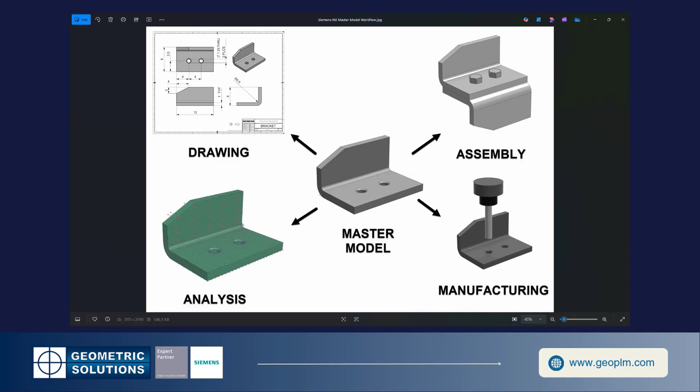I'm going to start using what we call the master model approach. So in this case, what master model does basically, whether it be a component or subassembly, I can pull information into a different file and work concurrently. So I could have one person doing one, another person doing the other, whether it be analysis or manufacturing. Once I have these capabilities in the context of Teamcenter, I'll be able to do this.

So in this case, I have a simple assembly, and each assembly is comprised of different components. I'm going to quickly highlight what they are. As you see, I also have my layer definition turned on. So in this case, I've already predefined all the layers in the specific locations of each layer. So now what I want to do is move these fasteners to another layer, whether it be a common practice within the company, or I want to use that to control the display of my component.

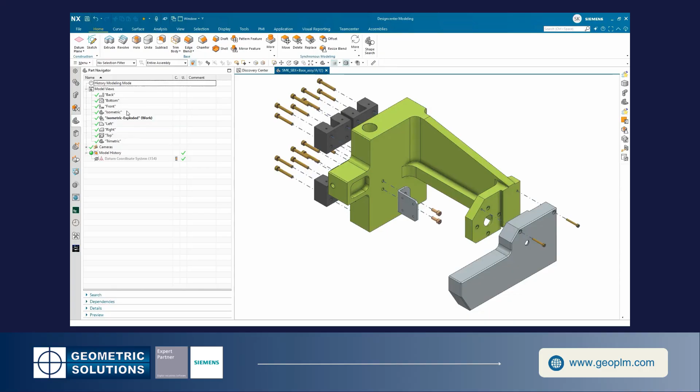I will quickly review some of the views already created inside of this master subassembly. So I see that there is an exploded view that's already been created. This is a very common practice to help understand how these parts are assembled together.

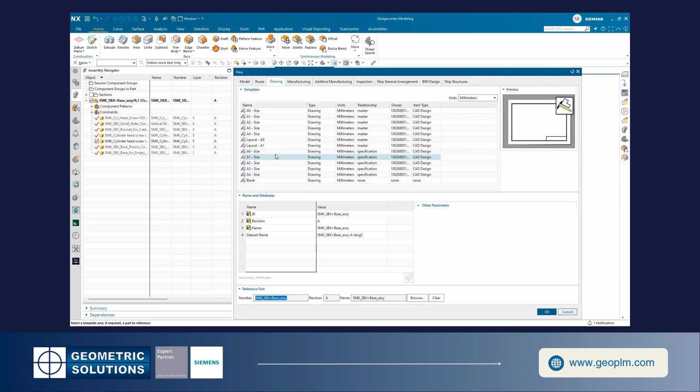So once we approach this, we're going to go ahead and create a new drawing. In this case, in the context of Teamcenter, we'll be using a specification. So I decide to select a particular size that will fit what I'm trying to create. Once I've selected that specification, and know it is referenced to the subassembly, I want to go ahead and generate that. Once we come in here, it'll give us the title block creation capability. Then we go ahead and populate that information.

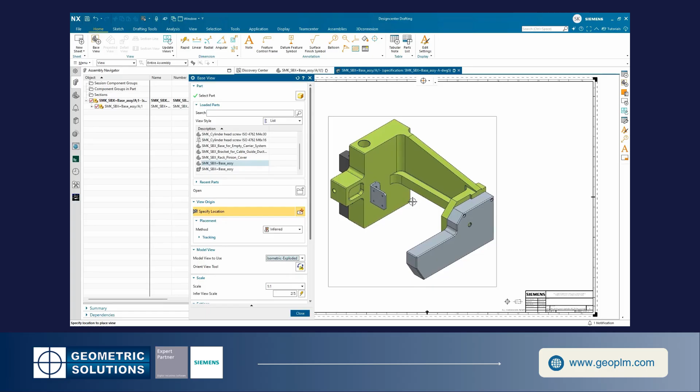Next, what you want to do is just start adding views. We notice that when we add a view, as we scroll down, it's coming from this base assembly. So it is pulling views from there. We see we're not pulling the view from this drawing, and here are all my view options. I do see my exploded view, but when I see that on the display, it did not capture the explosion from the view that was previously defined. This function and capability will be available in a future release of Designcenter.

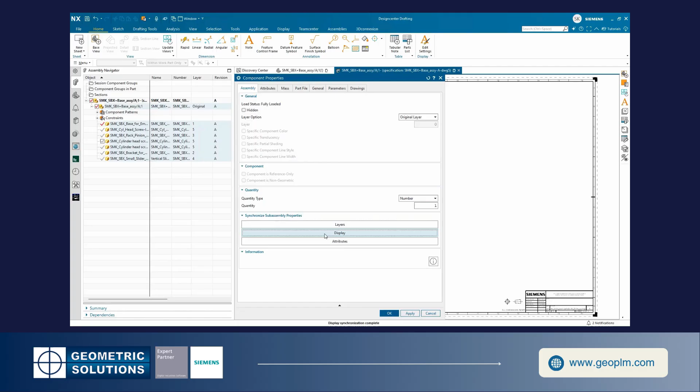Next, what we want to do is synchronize all the layers that were previously defined in my subassembly. We right mouse click and select the subassembly. We see that there's a property. Under the property, there's an assembly tab. So let's synchronize the layers. Once we select that, you notice that it changed from the original to the layer that was specified earlier in my subassembly. So once that is done, let's make sure all of our geometry is visible, and then we want to go ahead and add the view.

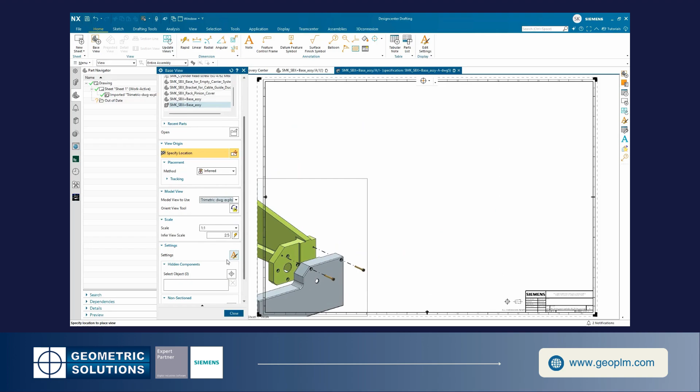In this case, we want to add an exploded view that was previously created at the drawing level. So I'm going to go and add the base view. I'm going to reference the drawing file, not the subassembly, because in here I've created the exploded view. We see that the view is being added. We select a proper view scale, then we can add that. So once that is added, we see that it is properly defined.

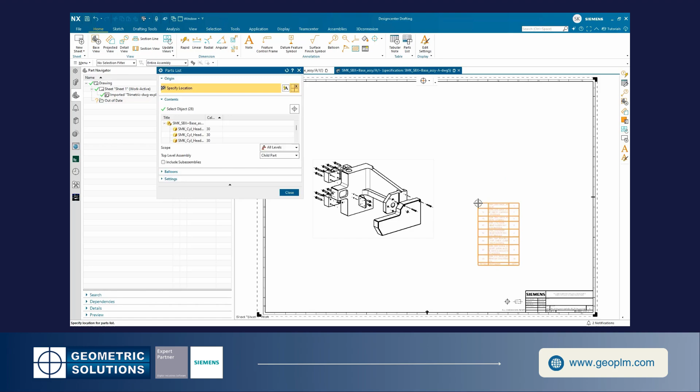A lot of times, as a personal preference, I don't like to see the view border so dominating in my drawing. So I come into preferences in drafting. I can go ahead and change my border color to a lighter gray. So the color is still there, but it's a lot more faint, so I can still see the border without it dominating my drawing. So now I want to go ahead and create my parts list, and properly extend and expand that to a size that I'm comfortable with.

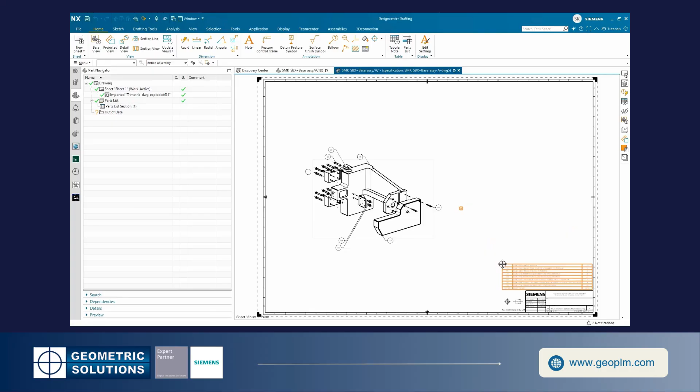So now I want to show not only the bill of material, but also the balloon callout. Right mouse click on the view, then we can add that directly into that. The next thing we want to do is create a revision block. That is a very typical behavior of a drawing, that we have a revision block.

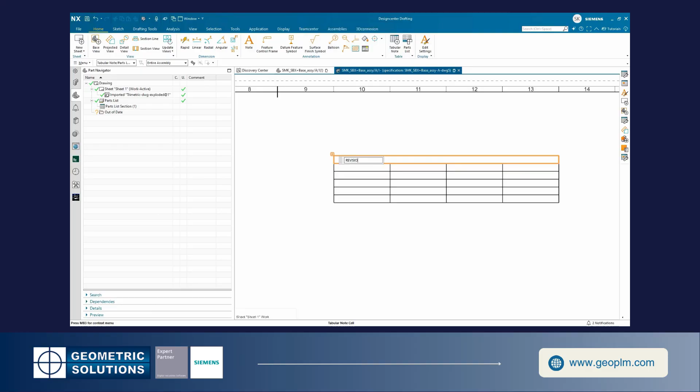So I create basically a tabular note, combine the very first row of that. I want to call that revisions. And then I want to come back and add, per the standard practice, whether it be ASME or ANSI or whatever standard you're practicing, all the different subcategories into that. And then I want to format that properly, whether it be bold, description, the width and all that, to match what is specified in the standard that I'm following.

So once that is done, I want to just place that in the top right corner of my drawing. I hang it over there. So now I have my revisions.

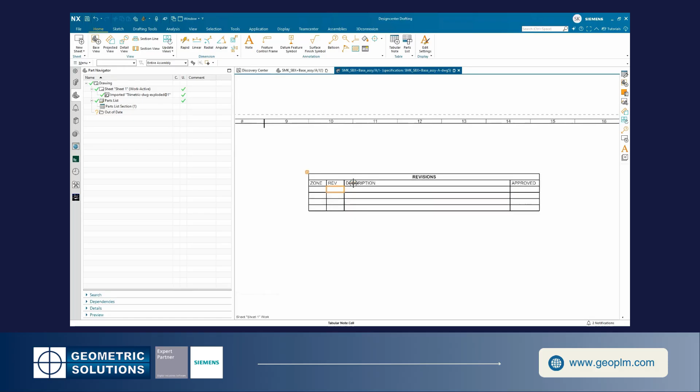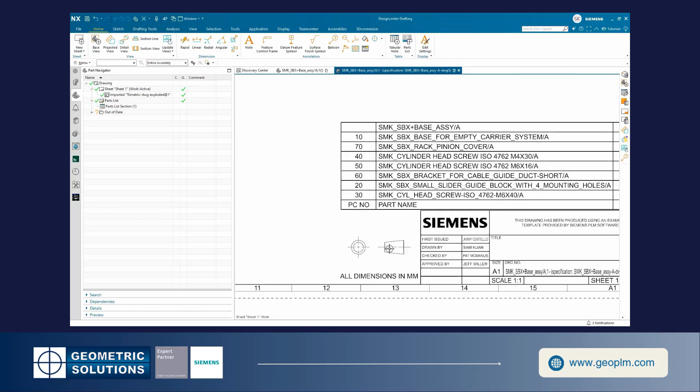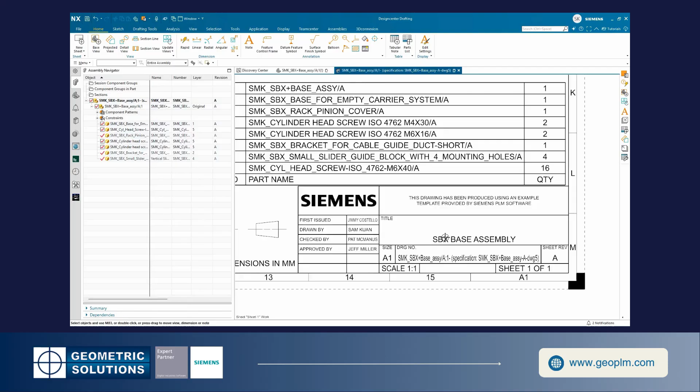Next thing we want to do is add attribute information in my title block. Under my title block, the third angle projection information is already there, but my title block information is not there. So I do a right mouse click on the properties, go into my subassembly. I see that in the attribute field, the title block is empty. So I'm going to quickly type in what my title block naming is. The minute I select apply, it fills that in. So that's how we filled out all the attribute information that is available in the drawing.

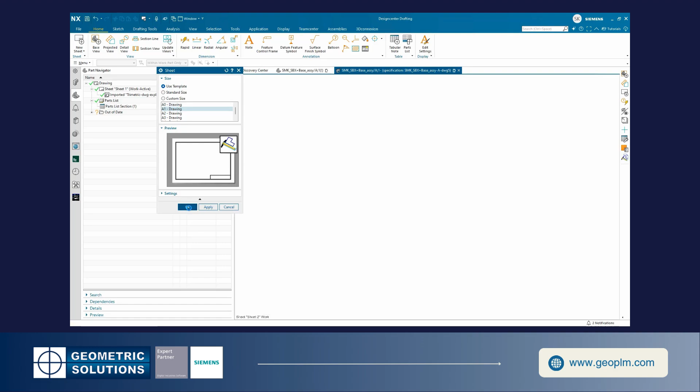Now I'm ready to add a second sheet. So do an MB3 on the drawing, insert sheet. I want to consistently use the A1 drawing. So that's going to add a second sheet, sheet 2. I don't need to populate the title block. That information is already there on sheet 1.

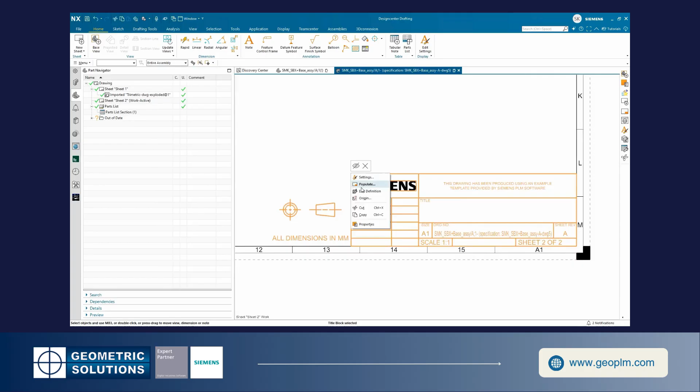What I want to do is make that selectable. So I'm going to my layer. In my layer setting, that is viewable but not selectable. So I want to select 256. Now I can select that, do an MB3, and do an edit definition. Once I do an edit definition, I can select edit table, which gives me the capability to do something.

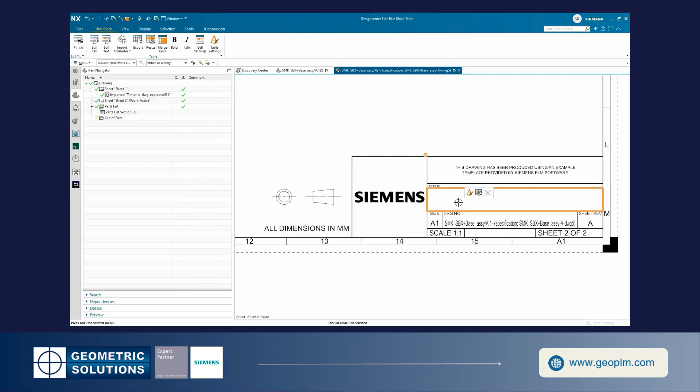So I want to drag all the way down to the bottom, doing mouse button 3, and merge the cells, because I don't need to have that information available. And likewise, I can come in and insert a title later on. So that concludes that portion. Now I want to quickly insert the subassembly views. Once I have the proper scale defined, I can project from the base one view to the top, one view to the right. So now that is sheet 2.

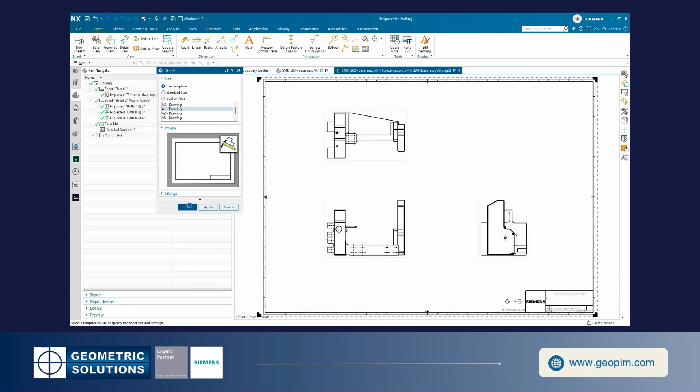So let's go ahead and select sheet 3. I do an insert sheet again, same thing with A1. Now I want to follow this practice in sheet 3. In sheet 3, same thing, I don't need to populate that information, but I want to add my base view.

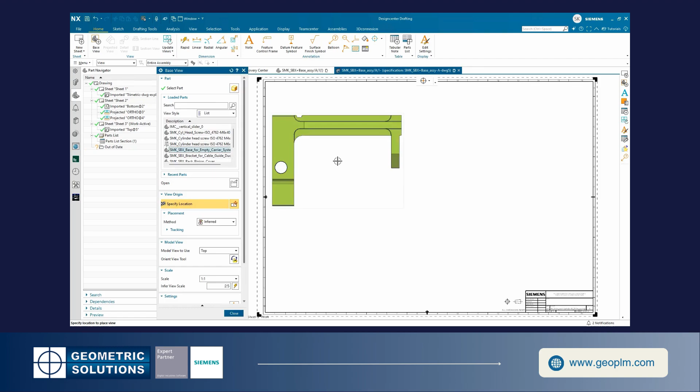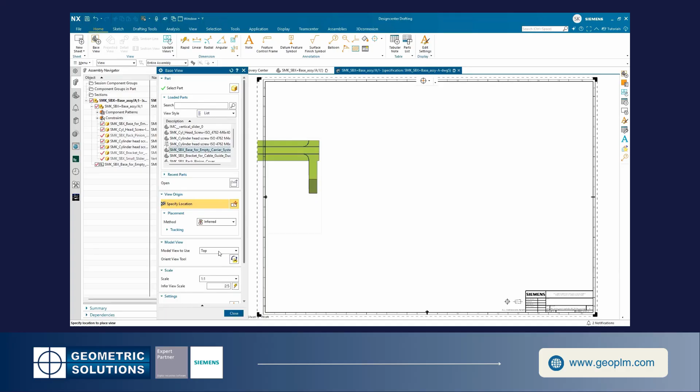So this is where some of the layer settings become critical. Now I can select a particular component from a display part. Currently those parts are loaded, so I can use that. But the minute I add that particular view, in my assembly structure you will see it indicating that you are grabbing a particular component and adding that component to this drawing. I don't want to have that tagged on as part of my bill of material; even though it does not show up in the bill of material, it will show up in the assembly navigator. So that is that particular approach. By selecting that, now you can do that.

Okay, so what I want to do is just do a right mouse click and remove that.

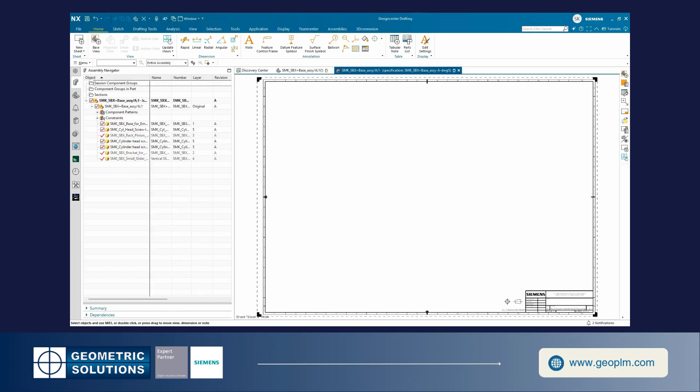Let's use a different method by adding a detail component view. So first we add any particular view. We want to go using the layer visible in view option that is inside the system. I want to go ahead and select that view and deactivate or make those invisible. Once I select apply, all we see is that particular component.

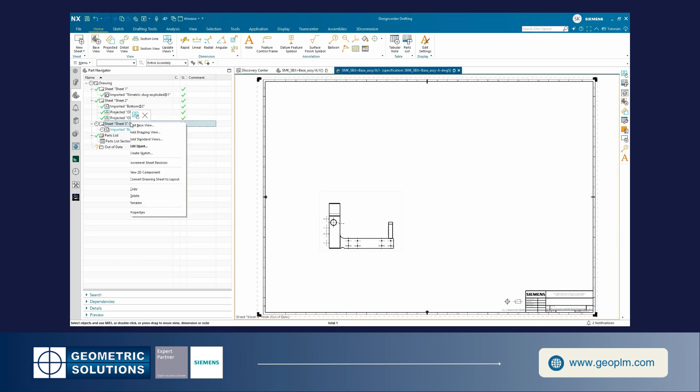So now we can do an update view. All the geometry will be gone. However, we want to do a minor cleanup of some of those center marks that were there already. I just want to go ahead and remove that. Once that is done, I'll be able to use this particular view with only the specified layer that is visible.

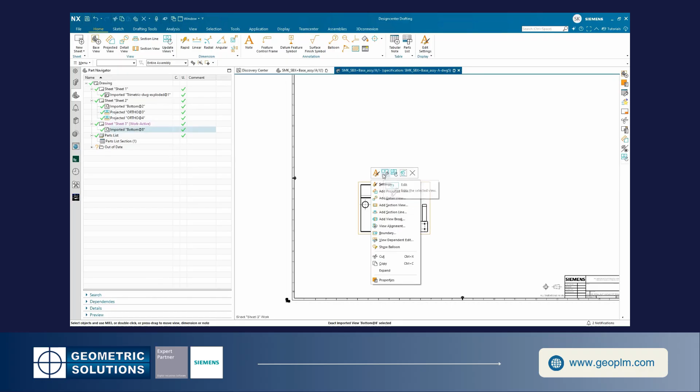So in this case, I want to go ahead and project this to the top and also to the right. That's how quickly I can use this particular method to create a detailed view of the drawing in the context of the assembly. What we want to do next is to start adding some of the critical dimensions. So let's go back into the assembly sheet. So that'll be sheet 2.

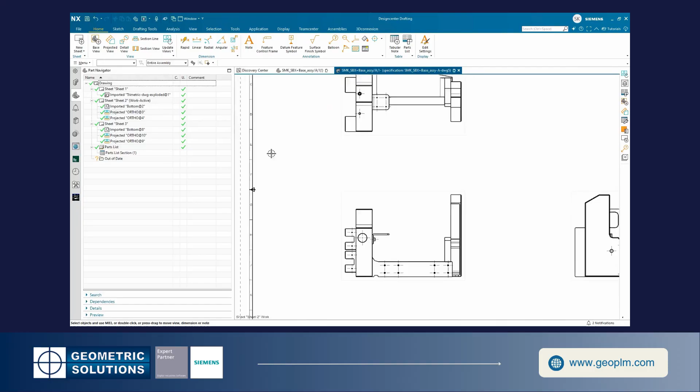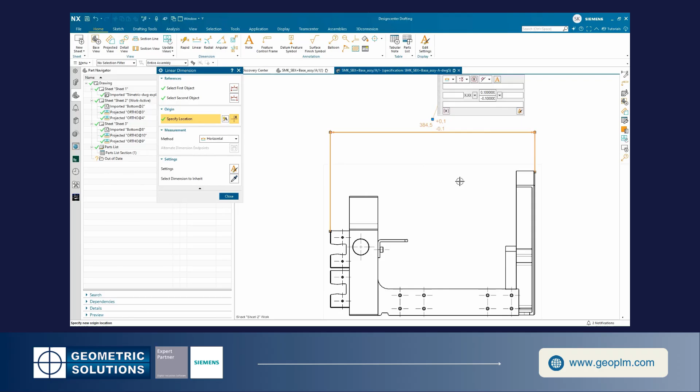I want to go ahead and create some assembly dimensions that are critical for the overall assembly information that is required on the drawing. So we can add the dimensions. Once a dimension is added, we can come back and correct the tolerance, or add a tolerance while I'm adding dimensions. So in this case, I want to add some tolerance and make sure that some options are available. So I can come in there, add some of the tolerance and specify what the tolerance may be.

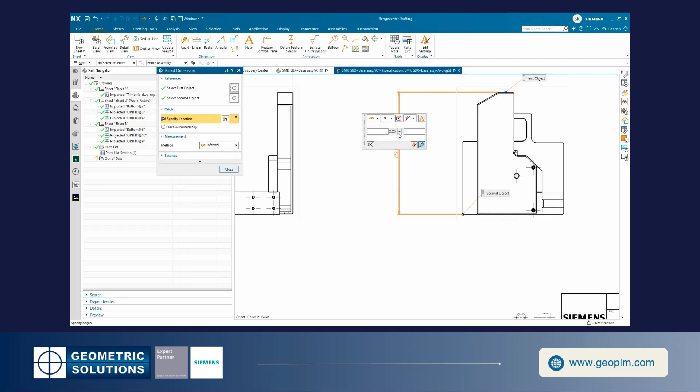So that's how I go about creating these types of assembly dimensions that I can utilize for the assembly of this subsystem in any situation. I want to go ahead and do that first. And then when I am done, I'll come back and do the same thing at the detail level in creating detail dimensions as well, like what I previously created.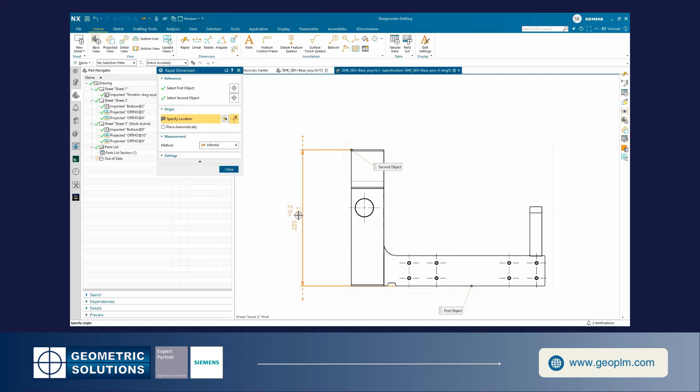So now at the detail views, I want to go ahead and add some of the dimensions that are critical for defining this detail component's shape and size. I can add the tolerance while I'm creating a dimension, and define what the upper band or lower band of a tolerance would be. So I want to go ahead and add these dimensions to all these different views to showcase that.

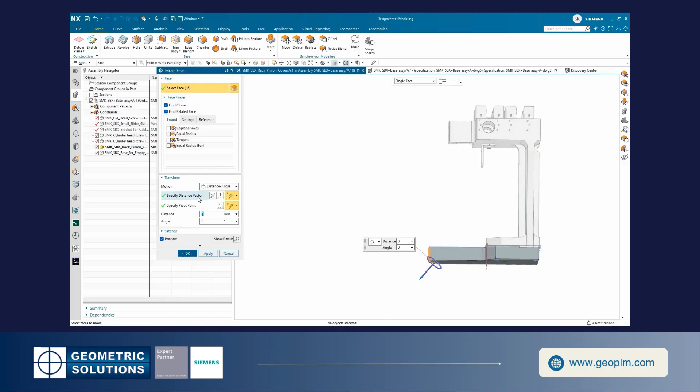Next thing we want to do is make some design changes. Whenever there's a design change, that obviously will affect my specification or my drawing. So I want to go ahead and make a quick design change using the synchronous method. I want to change the size of this particular cover, so I want to update that cover to increase the size a little bit.

Then as we come back into the drawing, you will see a clock icon symbol that shows up at the drawing level. So we go back into the drawing, we see that in the part navigator, and we see that clock. We can select a drawing and just double click on it, and every view and every sheet will update correctly.

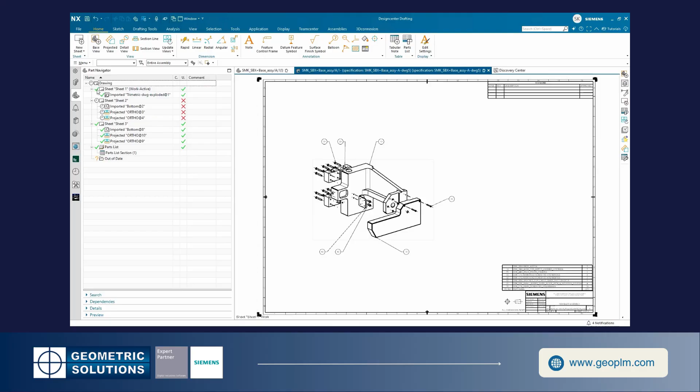Now, we want to take a look from each sheet's perspective. So I want to go back to sheet 1 and go to sheet 2. Same thing, update that. We notice that there's a change. So that's another way for me to see that. On sheet 3, there was no change affected, so you will not see any changes that need to be done.

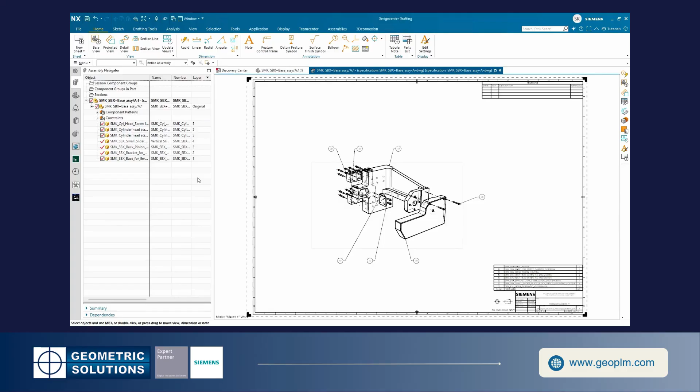So in conclusion, to create a technical drawing inside Designcenter NX, we quickly reviewed how this part came to be, how we add some information in our title block, create a bill of materials, how we change the border, and also add a revision block. And also we created different sheets.

We have sheet 2, which is the assembly drawings. Inside of that, we have all the different dimensions and views. And then likewise in a detail view. This is how we create a technical drawing inside Designcenter.